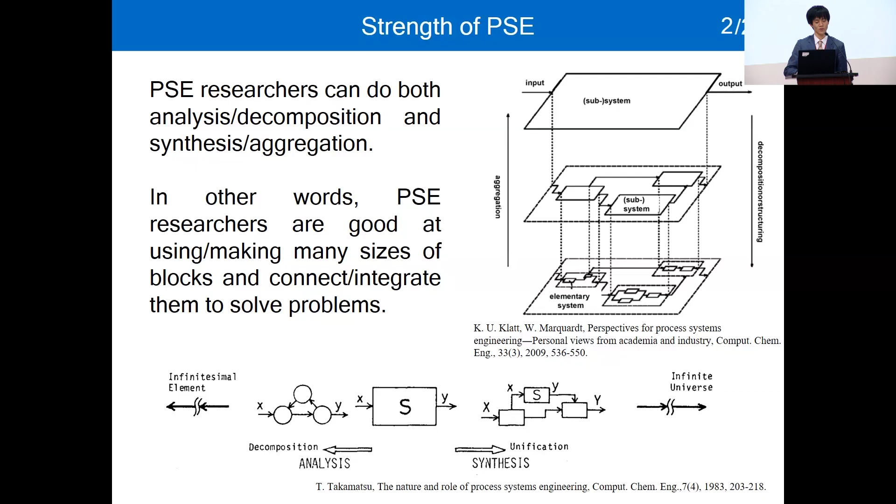PSE methods and that philosophy have been applied to many fields. Typically, chemical and petrochemical engineering were the target applications of PSE. As time passed, we gained many more applications, for example energy, biosystems, pharmaceutical, healthcare, social systems, and now we have the most important problem of carbon neutrality and SDGs. In the sub-theme of energy or carbon neutrality, fuel cell research is there. Especially, there are many kinds of fuel cells, but today's talk focuses only on polymer electrolyte fuel cells.

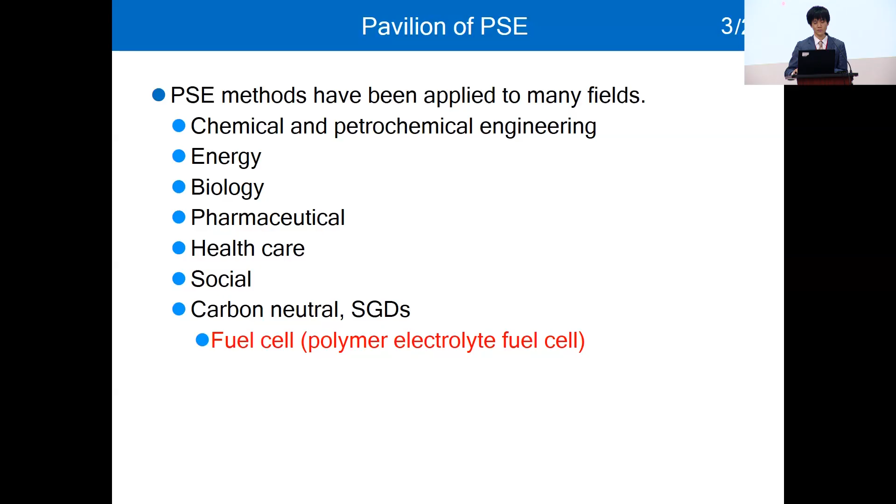And what is a fuel cell, or what's the need for a fuel cell? I will talk about this. Background: the demands for carbon neutrality and hydrogen energy use are increasing to achieve carbon neutrality.

In Japan, former Prime Minister Yoshihide Suga announced that Japan will achieve carbon neutrality by 2050. So in Japan, many investments and many national projects are underway to achieve this grand challenge.

So what is a fuel cell? In a very simple way, it generates electricity and H2O, water, from hydrogen and oxygen. If we use a block diagram, which is very familiar to you PSE researchers, the inputs are O2 and H2, then the FC, the single cell, generates electricity and H2O. Today I'm going to decompose this FC single cell, and I'm going to synthesize the FC system in total.

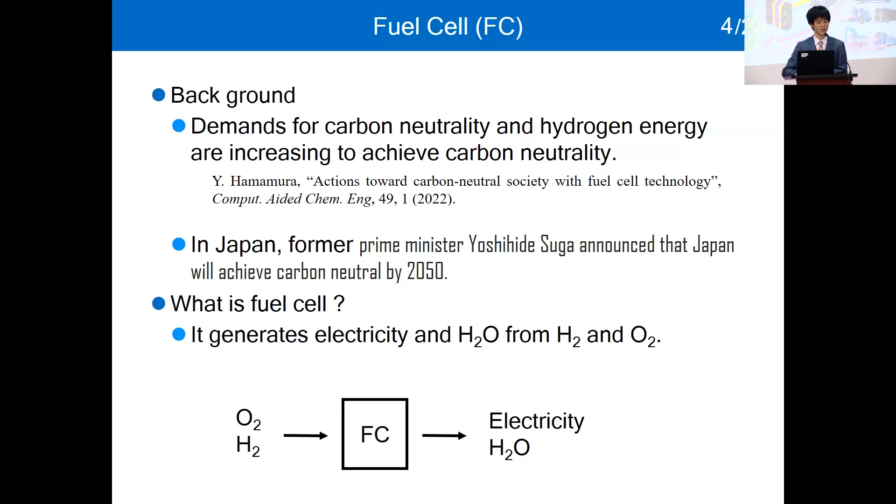To develop or design a nice FC, we need many kinds of research knowledge subjects: transport phenomena, chemical reaction, electrochemistry to understand the electrochemistry in the MEAs, and mechanical engineering to design the machine, and material engineering to characterize the catalyst, or to make a better catalyst, or better materials for the case. Also control engineering or optimization methods are totally required. So multidisciplinary feature is very important in FC R&D.

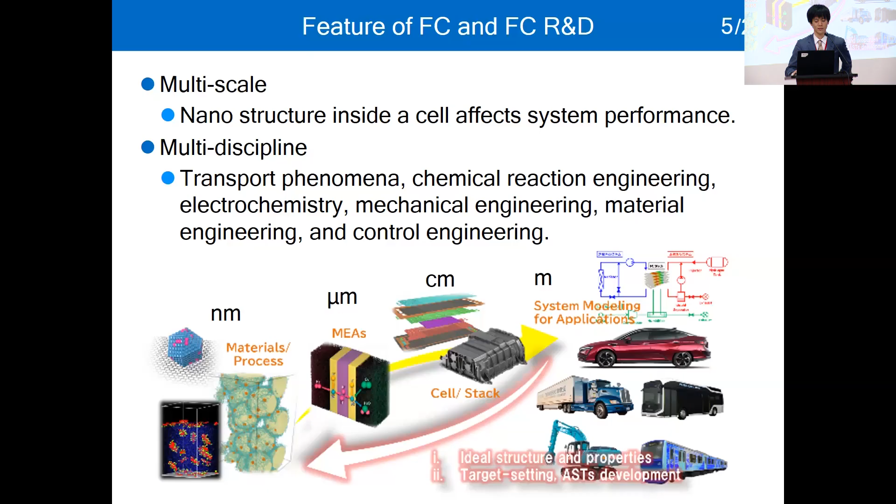Okay, then let's decompose or analyze the FC single cell. Here we have a blue box, the FC single cell, and inside it we have many components. From top, we have the anode side bipolar plate or channel. This conducts electricity here, and also has a channel for H2 transportation.

H2 comes in from here, and then goes to the anode gas diffusion layer. This is for evenly distributing the gas to the anode catalyst layer. In the anode catalyst layer, the H2 reacts to form 2 protons, and here we have electricity. Then the proton goes through the PEM, proton exchange membrane, and at the cathode layer, proton, oxygen, and electricity meet. This reaction between O2 and hydrogen produces water.

From the cathode side, O2 comes in, and the cathode bipolar plate and channel are there, and the cathode gas diffusion layer diffuses or transports the O2 to the cathode catalyst layer. Electricity goes outside of the FC single cell, does work, and then goes back to the cathode bipolar plate.

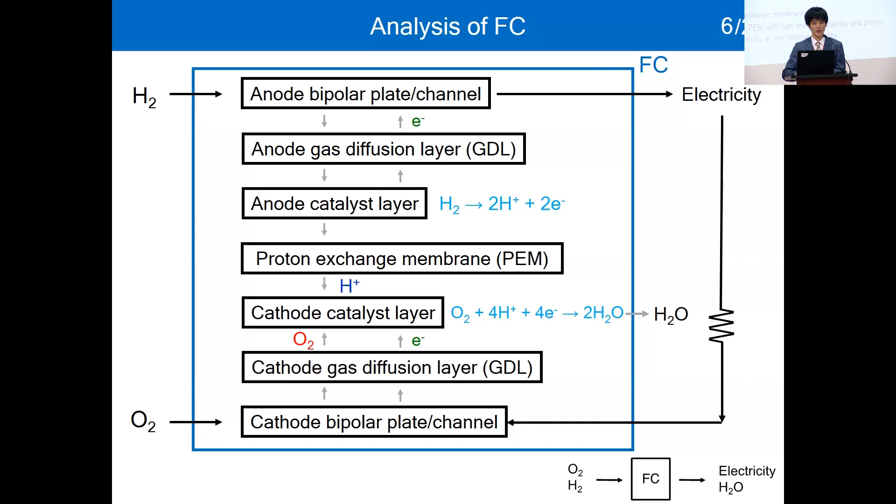So here are the research questions for material engineers, typically for each part of the FC components. For the anode or cathode bipolar plate or channel, it is required to optimize the shape for effective gas transfer with less pressure drop. It's very tough work, and some expert researchers focus just on this area.

Also, for the anode and cathode gas diffusion layer, it is required to make a thinner layer to reduce gas transfer resistance and ohmic resistance, without increasing the concentration difference at the catalyst layer. It's a very difficult problem, and some experts focus just on this problem.

This is also a mainly very active research area: research questions for the anode and cathode catalyst layer. Many researchers want to make a highly active catalyst with high durability and less cost. But they don't know the system performance or controllability of the system. Still, there is much research in this area.

Also for PEM, proton exchange membrane, they want to make a PEM with high thermal durability and proton conductivity even at low relative humidity.

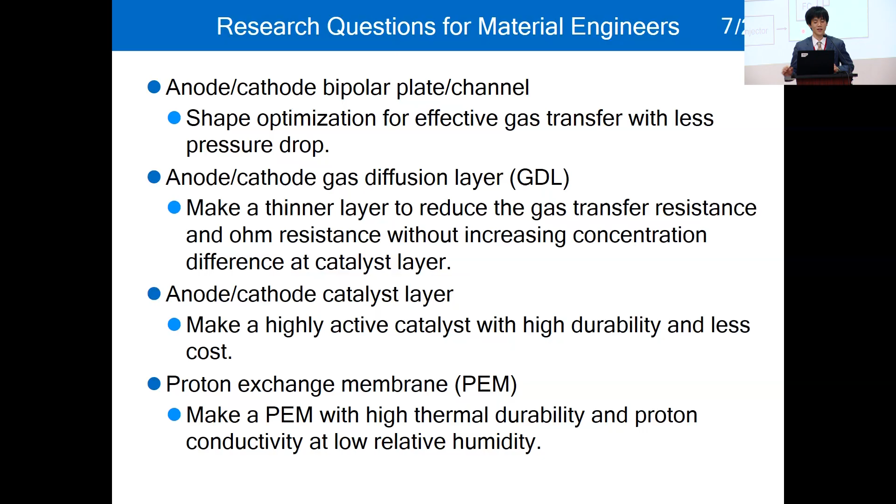Okay, then let's synthesize the FC systems. An FC system, of course, is not simply a single cell. We need many FCs, many numbers of FC, and we call this an FC stack, in which FC units are accumulated or stacked. And of course, to give air or oxygen to the FC stack, we need an air compressor. And for H2, we need an injector.

Also, the FC stack generates heat by the reaction, so a water pump is required to convey the coolant. Then we can have electricity, water, and purge gas as the output. So FC systems are composed of many kinds of components. We need to nicely synthesize the FC system using these components, not only the FC single cell.

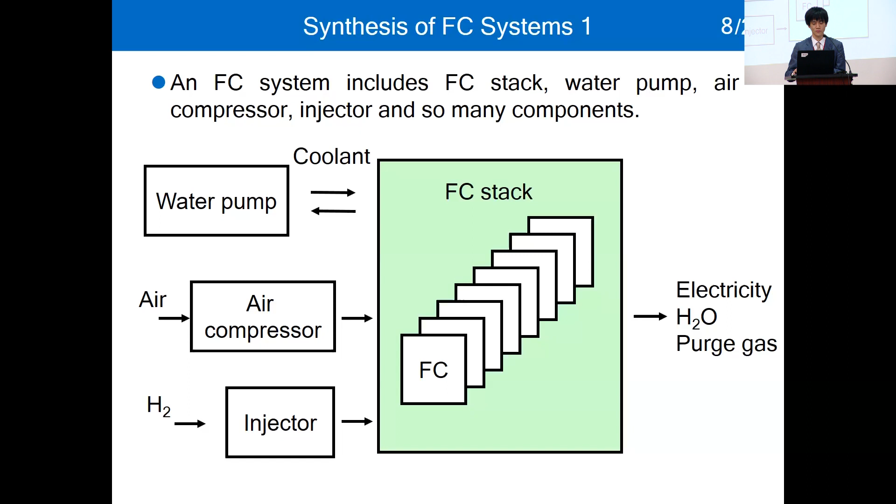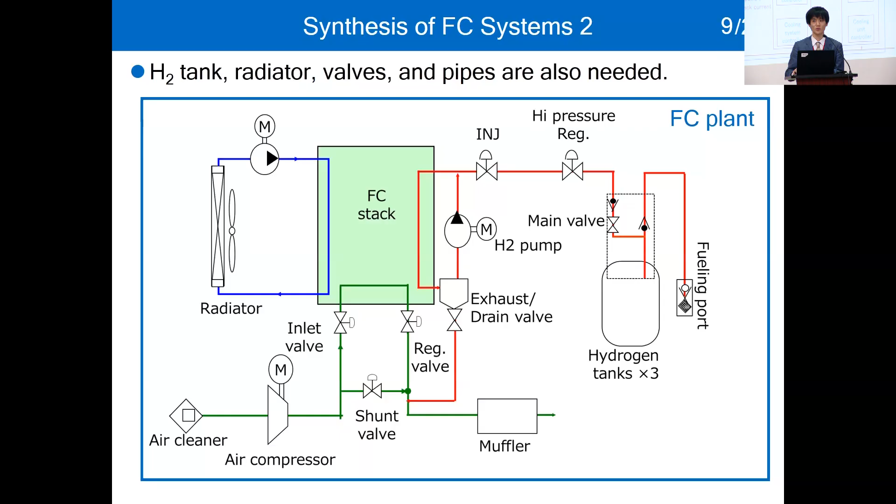I explained this part in the last slide here, the FC plant. So to operate the FC plant nicely, we need an FC plant controller, of course. And what is the set point?

What are the control variables? In general, the net power has a set point, and that set point of net power is given to the FC plant controller. Then the FC plant controller determines the valve angle or rotational speed of the water pump, radiator fan, or ACP, the air compressor,

or H2 pump. Then these manipulated variables are input to the FC system. Then the FC plant moves, and sometimes the electricity generates.

This kind of closed loop simulation or closed loop operation is required to implement the FC system in reality. And of course, the FC plant controller is also composed of many components.

In this, we developed a model of a controller like this. Here, the set point of net power comes in, and the electric power system controller determines the set point of FC stack current, because power consists of the current and voltage of the cell.

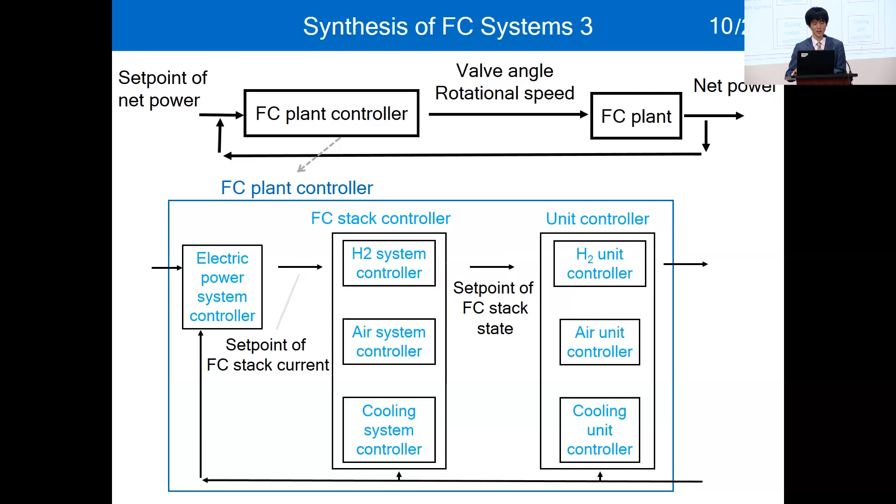So we need, again, many components to realize the FC system. And for the systems engineer, research questions are like this: what size of compressor should we adopt?

Or what size of H2 tank should we adopt? Or what is the optimal operation condition for maximizing efficiency or minimizing fuel cell H2 fuel consumption? Or what type of controller do you use?

Or can we control the temperature inside the cell or stack even when a large amount of power is required? If not, what size of radiator is needed? That kind of question is given to the systems engineer.

Do you feel that there is a huge gap between research questions for material engineers and systems engineers? We are doing the same thing—we want to reduce the environmental impact or CO2 footprint, but

many researchers have many different research questions. That means each researcher doesn't know the total performance of the FC system. So we need to integrate this kind of information, or integrate the power of all the researchers into one direction.

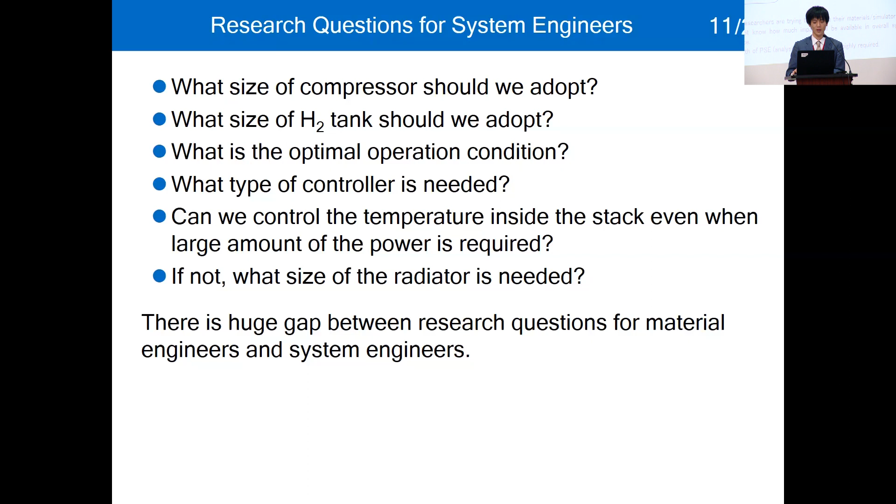Here, we have the expectation for PSE in FC R&D, because many researchers are doing research on FC, but individual researchers are trying to just improve their material, their simulator, or their machine, their

unit. But they do not know how much impact will be available when some change happens—for example, a nanostructure change, then what the performance of the car will be. To integrate the knowledge and maximize the speed of FC R&D, PSE researchers are expected to play crucial roles. The strength of PSE analysis and synthesis is highly required.

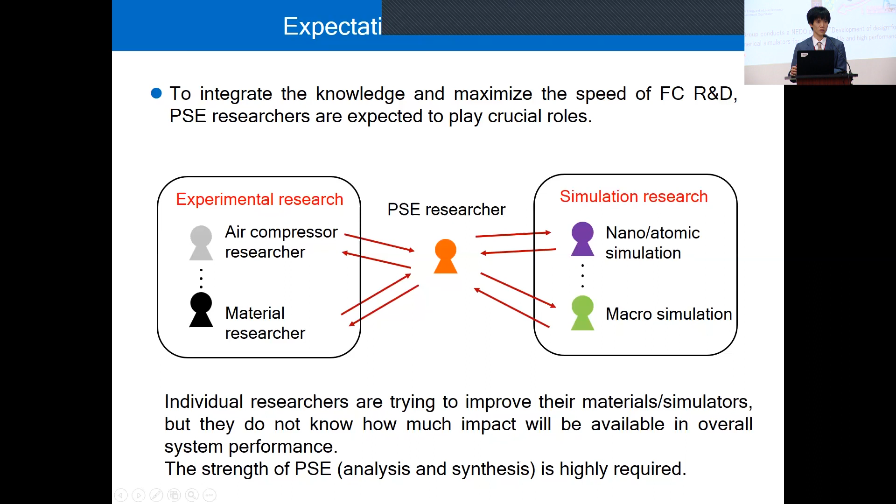In the data-driven approach, many data are measured at very sophisticated, very expensive instruments like X-ray or something like that. Then all the data are put into a big, huge database, and the material AI expert will extract knowledge from the database and show new possible ways of making materials or structured materials. That's one thing.

For the model-driven approach, we are developing the physical model for each scale of the fuel cell, from nano to the meter. I belong to the simulation group and I'm developing the physical model for simulating the FC system, from the atomic viewpoint to the meter, or system, viewpoint.

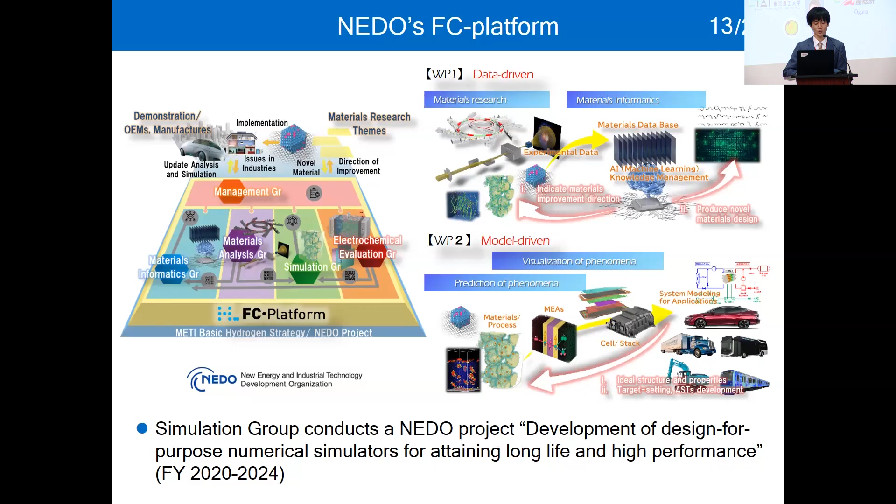Here is a member of the simulation group. Professor Kawase is the leader of this simulation group, and the other 8 or 10 people are doing research, with one person corresponding to one simulator, or one phenomenon, or one scale. We have been doing research for making good simulators for each scale of the fuel cell phenomena.

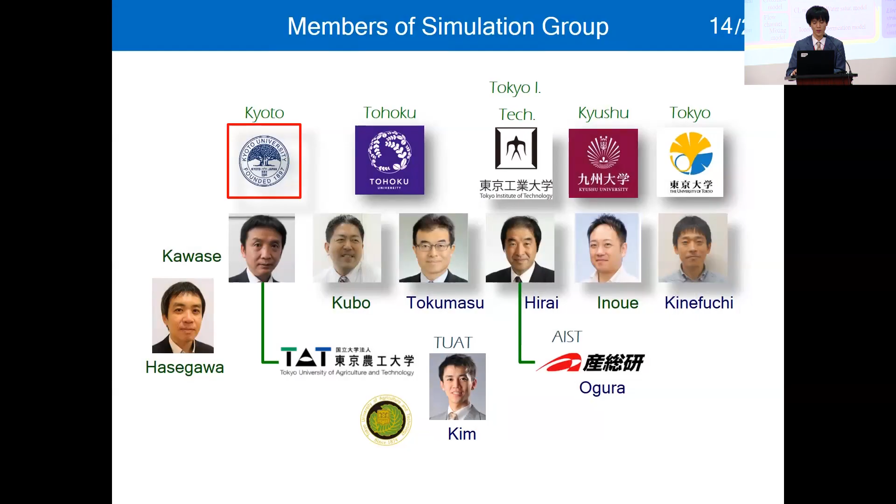This graph shows how many simulators, or how many phenomena, should be considered in PEFC. It's very complicated, even for a single cell. We need a model for roughly the PEM, and also the channel, and GDL, gas diffusion layer, and also the electrode model. Even the fabrication process model is required, because the nanostructure will be determined by how they are produced in the process.

For the PEM, we need a PEM degradation model, composed of 3 phenomena: chemical, mechanical, and migration of radical quencher, something like that. So we need experts just for modeling this phenomenon.

Then there's the PEM water sorption dynamics model, because the relative humidity, or how wet the fuel cell is, strongly affects the performance of the FC. So we need a model for the water behavior in the cell.

As I mentioned, the GDL is for evenly distributing the gas into the FC, so we need a very sophisticated way of understanding how the gas is distributed in the cell. The size of the GDL is like 10 micrometers or something like that, very thin, very small scale phenomena understanding is required. Also, very similar to the GDL, the flow pattern for the channel is very important.

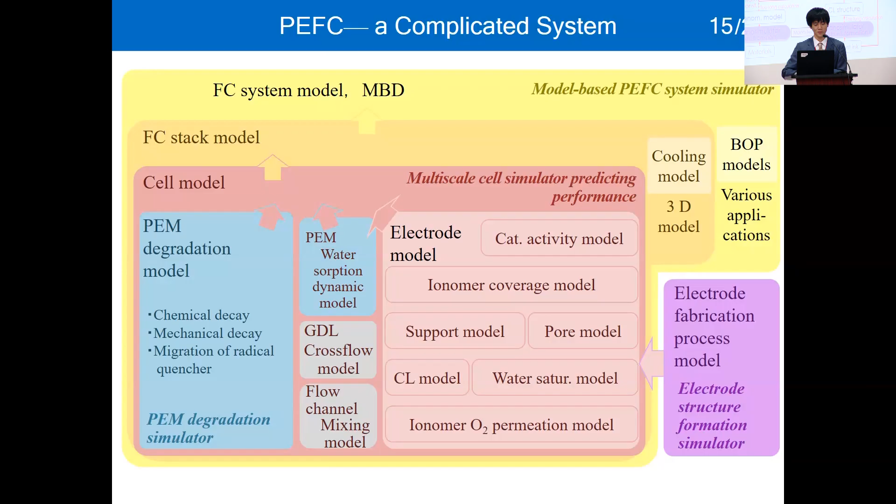To realize the total simulator, we propose the synthesis of an integrated simulator. Firstly, here is a macro simulator called FC Dynamo. This is a very rough simulator, but it is very fast, and it can evaluate system performance, like how many kilowatts are required, or the efficiency.

From here, we have a mesoscale simulator, which is a little more sophisticated. This simulator can calculate how gas is moving in the catalyst layer, and that gives input to the macro scale simulator. Then changes in the catalyst layer can be explained and evaluated by the macro scale simulator on the basis of FC performance.

We also have many other simulators, like a mesoscale simulator and a nanoscale simulator, which calculate the catalyst layer structure formation. We can also input materials information measured by materials engineers. In that sense, material engineers and system performance are totally connected through this integrated simulator.

Because of the limited time today, I will talk about just the macro scale simulator and mesoscale simulator.

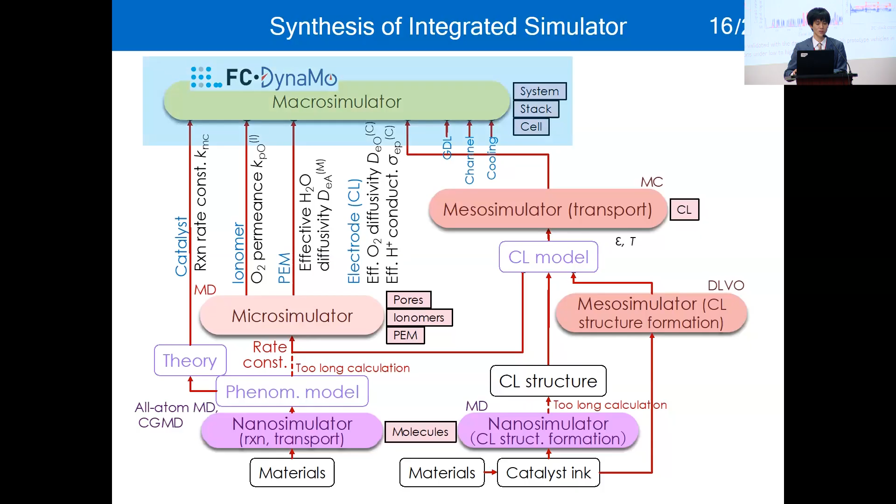The accuracy of this simulator was validated using the car produced by Toyota, validated by car data measured in the car. A prototype vehicle was used, additional sensors were implemented in the car, and many variables were measured. Here is a validation result.

The x-axis is time, and the y-axis is the FC stack current, H2 concentration, or liquid water level in the separator. Here is the FC performance. Red and blue show experiment and model results, and it shows a very good match between model and experiment.

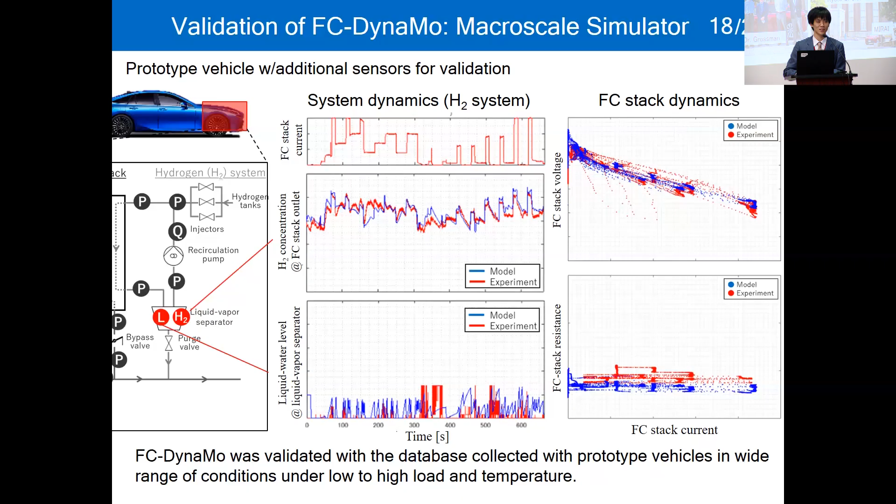At the June Kyoto PSE, we displayed the Mirai produced by Toyota. Here is Dr. Grossman. Dr. Grossman rode in this car and said, 'Oh, this car is very nice.'

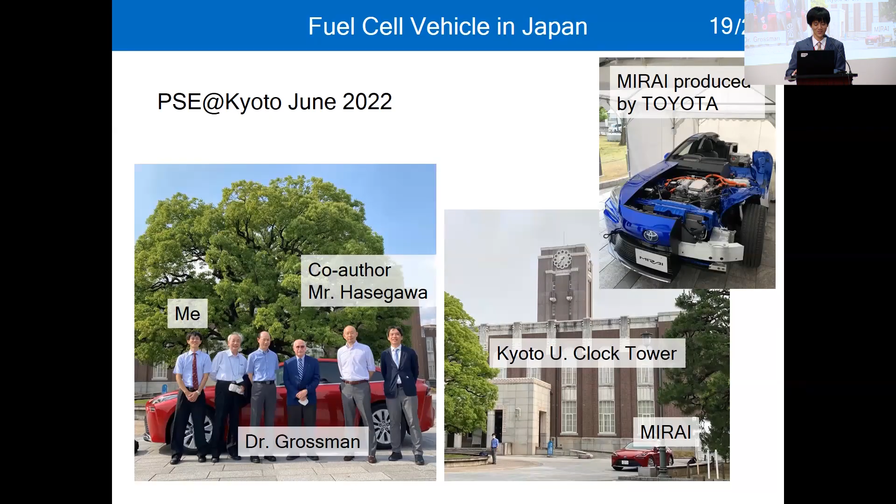Also, by using the macro scale simulator, some changes in MEA could be evaluated. For example, if needed, we can make the GDL very thin, or make the PEM thickness very thin, for example half, or if we have some nice catalyst whose activity is twice as usual, then the macro simulator can evaluate the system performance.

Here is the H2 consumption. If we have three improvements, then by comparing these values, maybe 10 or 8% of the fuel economy could be improved, or cell performance improved like this.

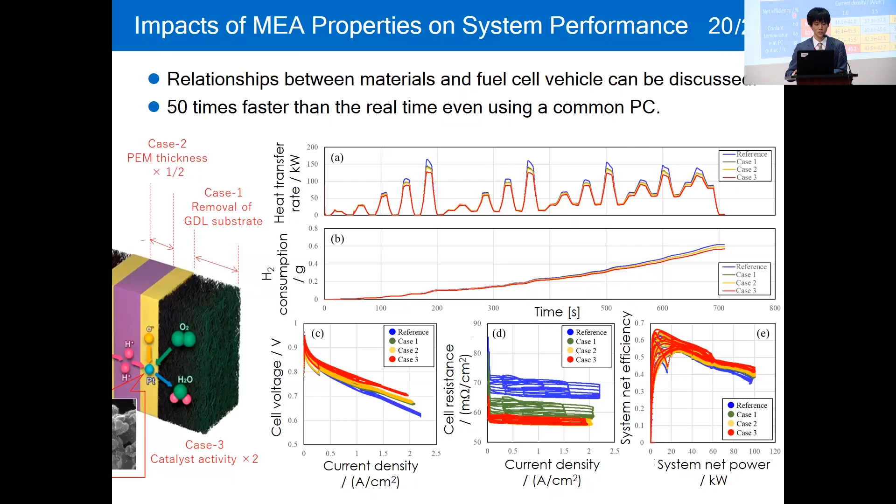Now, of course, it can be used for control optimization. Here is the energy consumption of the BOP. At a certain operation condition, the air compressor has a dominant consumption of power. So to generate the power, we need power for the ACP or similar components.

So to reduce this power, we developed a system to automatically change the controller setting. For example, here we change the flow rate of O2 to the FC stack. In a certain operation condition, the total performance or net efficiency could be increased by 4 or 1%. That's huge.

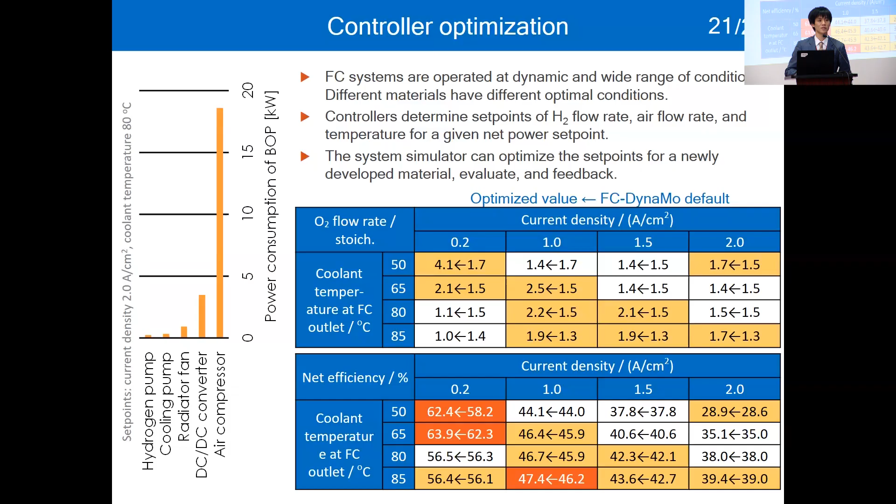Next, I will introduce the integrated use of macro and mesoscale simulators. Because the FC macro scale simulator has a limitation in its input, by using these simulators, we can take many kinds of measurements from the material engineers.

In mesoscale simulation, many kinds of sophisticated, detailed information on the catalyst in Toyota Mirai could be inputted. For example, the structure of the catalyst layer, pore structure, Pt particle size distribution, or size of carbon agglomerate. That's real measurement from the material engineers.

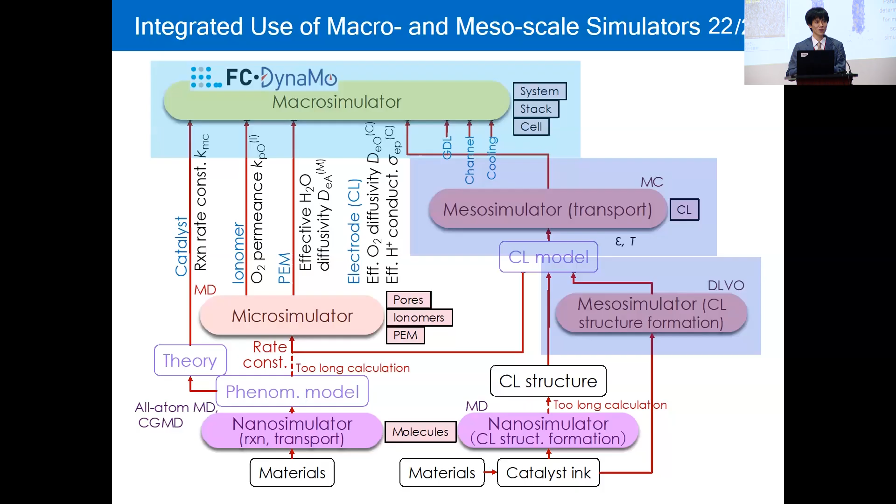By using these inputs, the mesoscale simulator could calculate or simulate the catalyst layer structure like this - these are for fresh catalyst, and these are for degraded catalyst. By these results, we can get the cell performance, and then parameter determination could be done for the macro scale simulation.

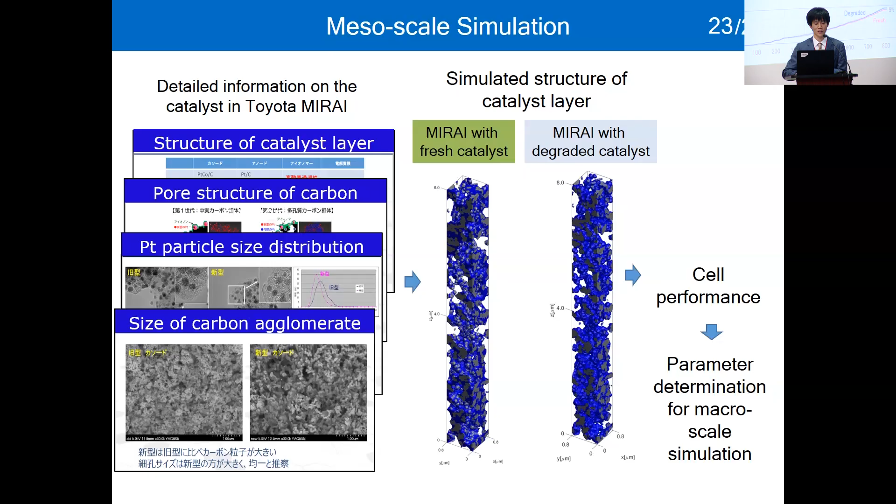To quantify this number is very important for material engineers.

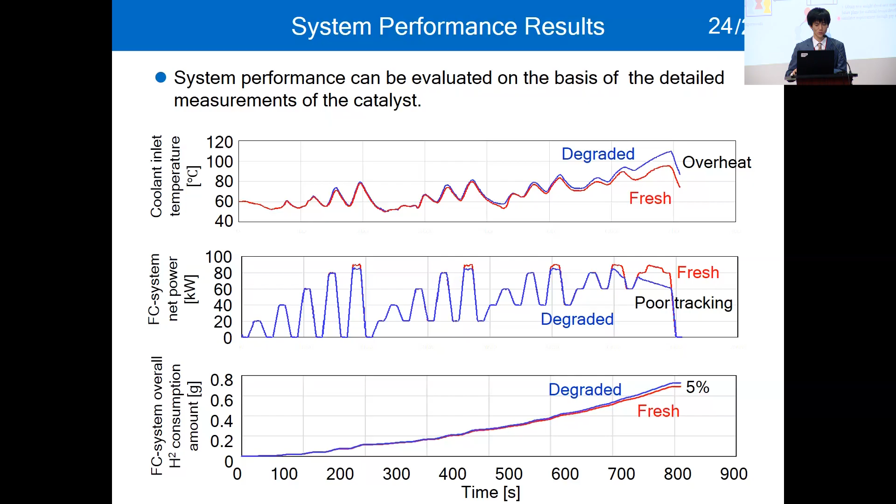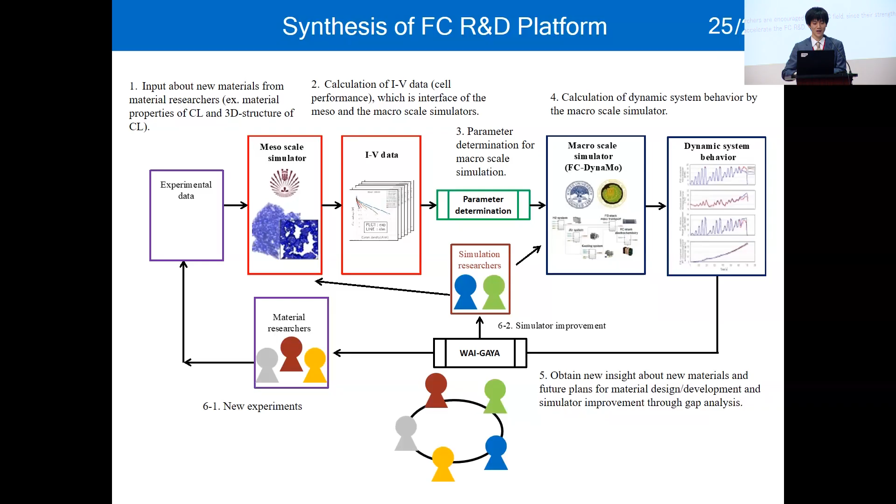Summary: today I talked about the feature of the fuel cell and its research and development. Fuel cell has the feature of multi-scale, multi-discipline - a very difficult but very interesting problem, for me at least, and I hope interesting for you, PSE researchers. I also introduced the Japanese national project on the FC platform. We are now developing the model from the molecule to the system and evaluating the system performance by simulation, using many kinds of newly developed materials.

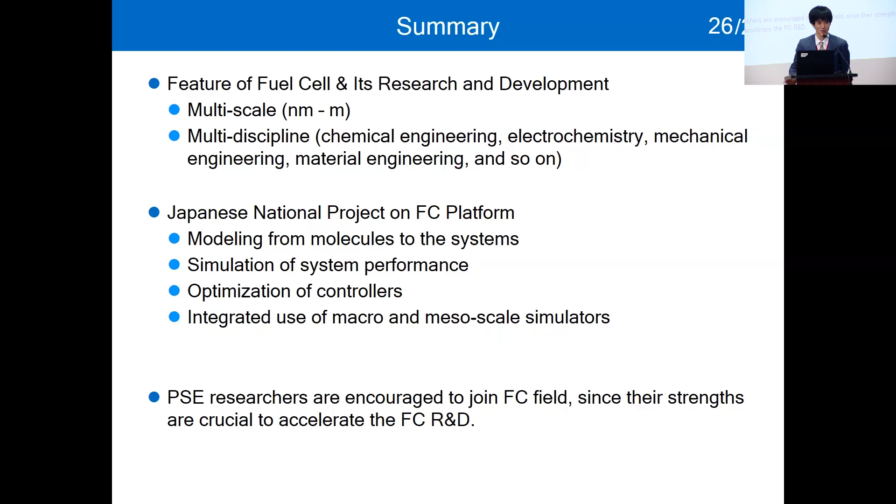We can also optimize the controllers and integrate the use of macro and mesoscale simulators, making a very high platform for everyone relating to FC R&D. The Japanese government also encourages PSE researchers to join the FC field, since your strengths are crucial to accelerate FC R&D. That's all, thank you for your kind attention.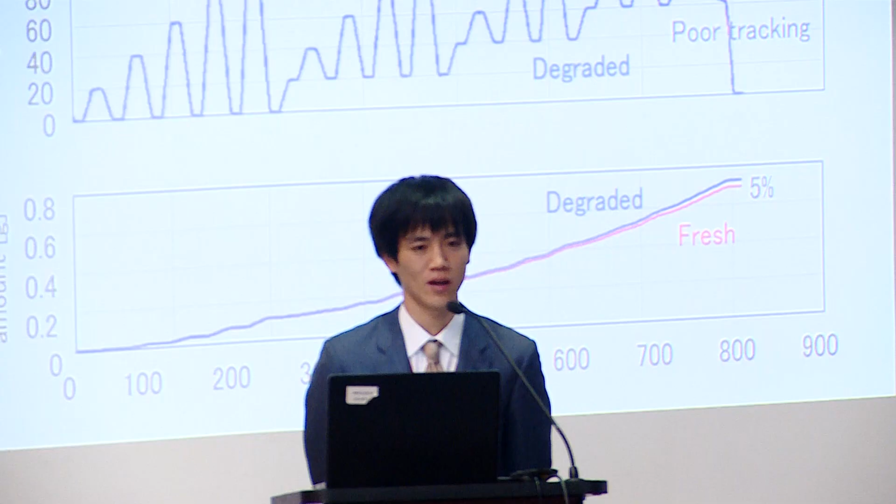Not real time. We connect the simulators offline by using the data. Here we have data from the mesoscale simulation, then the macro scale simulation is done after, because the calculation speed is totally different. The macro scale simulator is very fast, 50 times faster, but the mesoscale or nanoscale simulator even can take maybe 10 hours, or for nanoscale simulation it takes 1 month or something like that. So I don't connect them in real time.

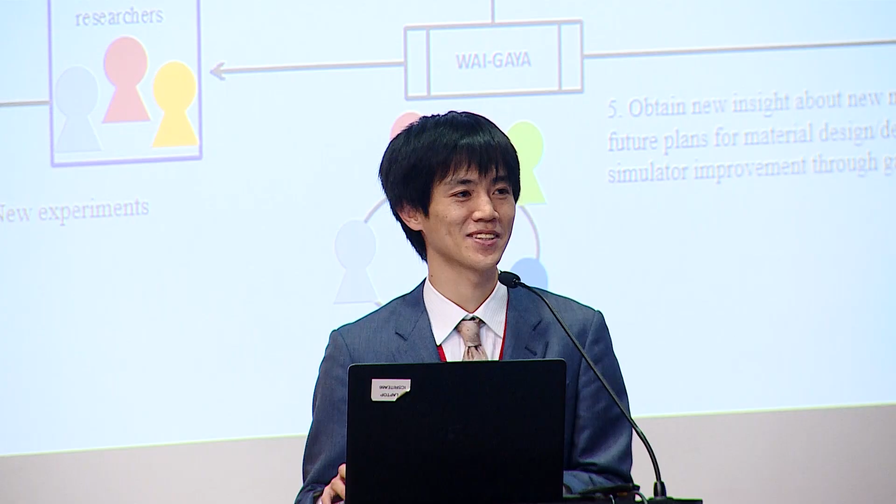Okay, fine, thanks. Any other question or comment? Thank you for your detailed presentation, Professor. In terms of the long operation of the FC, I think there may be some mechanical damage, including swelling effects of the membrane or something. How could that long-term mechanical damage be considered in the overall framework you presented, and if available, which simulators can do that?

Yes, we are now developing also the model for degradation, including mechanical and chemical degradation. The macro scale simulator is very fast, 50 times faster, so when we calculate for 1 week, one year of simulation could be done. Then we can evaluate how each part is damaged. The micro simulator could simulate that part, not the total. Firstly, microscopic understanding is required to formulate the physics, then I want to somehow merge the information to realize the fast calculation, which is done in macro scale simulation.